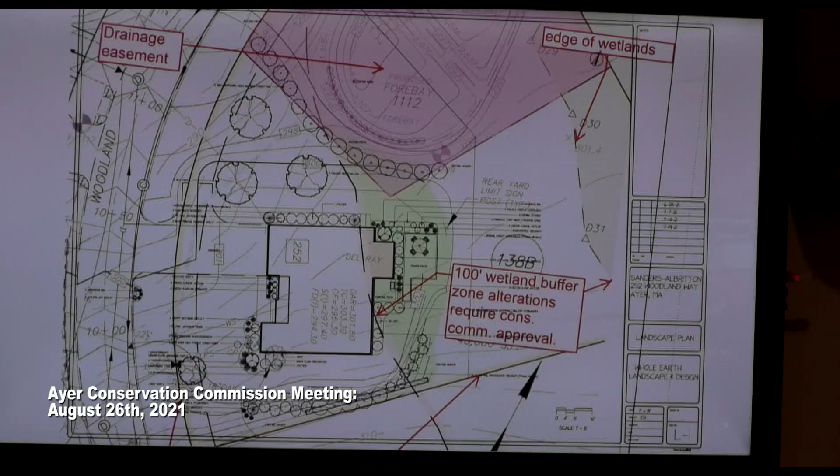I think along that row it might be forsythia mixed with some other plant, like a willow. I thought there were two or three different plants. So you've got forsythia, and next to the tree it says something else - oh yeah, it's forsythia and willows, two different kinds of plants. Some of which is forsythia and some is this - the forsythia is all the way towards the street, toward the left, with the odd, fluffy outline, whereas the willows are the round circles.

But really, very little of what they're proposing is in the buffer zone - just these few shrubs here, these few shrubs here, and then these plantings in the patio.

And you won't do those until probably next year anyway, right? Yes, the patio next year, with the plantings around the patio - I don't think we would plant them without the patio. That would all be considered the third phase all at once. And we've opted not to plant behind that because it's wild anyway, so there's nice coverage.

In the patio, you're proposing pavers so that the water would drain down through. Yes, we would do pavers, not stamped concrete.

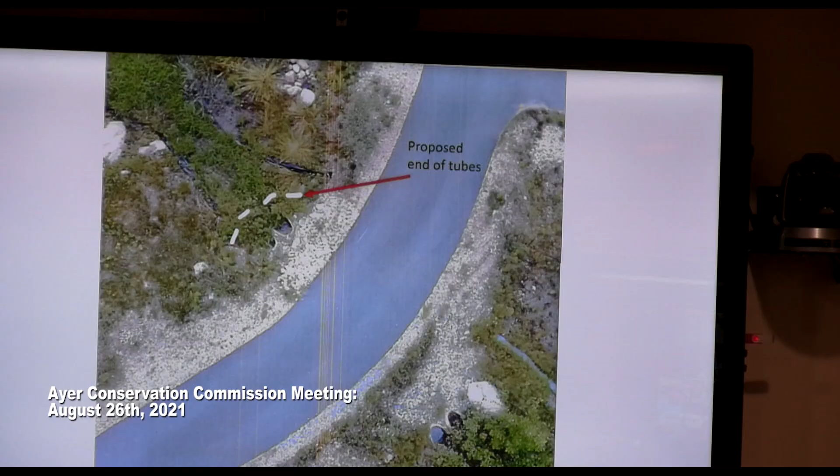Oh, yeah, she won't drive down our driveway, for example. But our proposal is to extend that slope about 3 to 5 feet to make the slope more gradual, and to raise the level to be level with the driveway, at least right next to it, not sloping down. The other side of the driveway, the north side, already has that configuration, and they're just not equal. So the goal is to make both sides equal and free from erosion, and safe to drive on in case you move a tire just slightly off the pavement. So it seems to be eroding. It is eroding, yes.

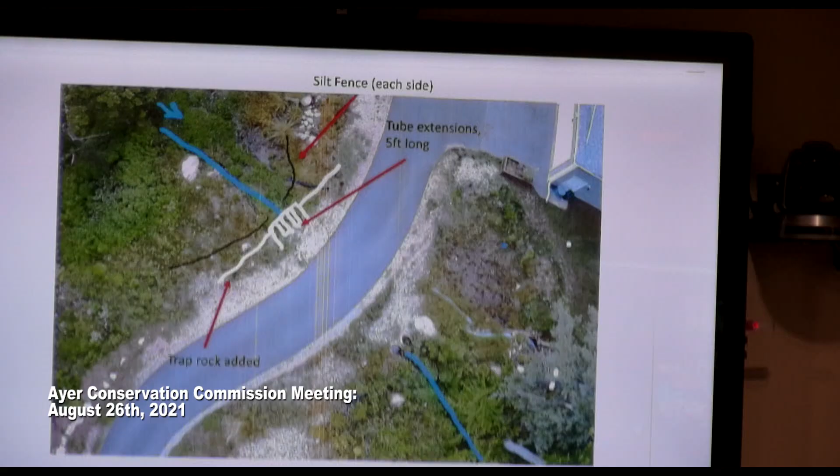The house was built in 2019, so the driveway's relatively new. The stone they put down was very small and sand-like, and it eroded very quickly. Currently there are rocks from the property just sitting on top of it to prevent further erosion, but that's definitely not sufficient.

Our proposal is to bring in Three Seasons Landscaping from Harvard to put trap rock on that surface to stabilize it. They would put a 1 to 2 foot drainage pipe inside the existing concrete drainage pipes to help extend those pipes to 3 to 5 feet, then blend it with the surrounding stone.

So flow is indicated by the blue arrow there, going from top to bottom? Correct. We're very conscious of making sure the flow is not impeded. We have a lot of groundhogs in our yard that use that as a thoroughfare, so we don't want to mess with that. We also don't want to impede the flow of water since there's a wetland upstream that flows down to a stream. The internal diameter of the pipes there is about 2 feet, so my request to the landscaper was to choose as large a pipe as will possibly fit, to try to maintain the diameter that's there currently.

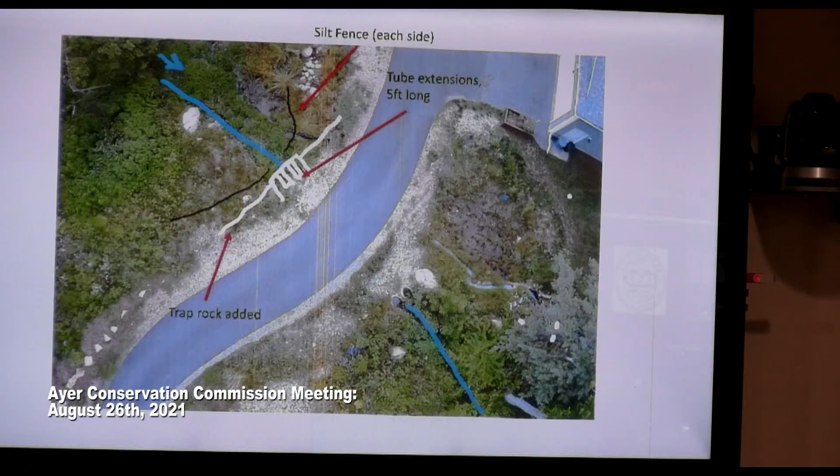So the trap rock would be extended about 2 to 3 feet? Probably close to 3 feet. And just trap rock, no dirt or anything? No dirt, yeah, just trap rock. There is a note for a graded base, but that would be immediately next to the driveway as a driving surface. Nothing with sand will be anywhere close to the wetland, only big stuff that won't flow off.

So this is really complicated, actually, because DEP has the superseding order on this, or has the order - this happened before I arrived, but somehow DEP is involved. I think in the past we've learned that we can still issue our own permits even if they have an active permit. I don't think Calvin has applied to have this cleared up yet.

You haven't told him to. Not yet. Since he does everything I ask him to. That's what he said to me the other day. Keep asking then. Yeah, I know. Let's make a list.

So for the whole project, they need a COC from the state for the superseding order. This probably should have been a more robust stream crossing than those 2 little pipes, and I honestly don't know what DEP would think about this - they're the ones that okayed that stream crossing, apparently. So if they have a problem with this, they could raise it during their 10-day appeal, but they sort of enabled the problem.

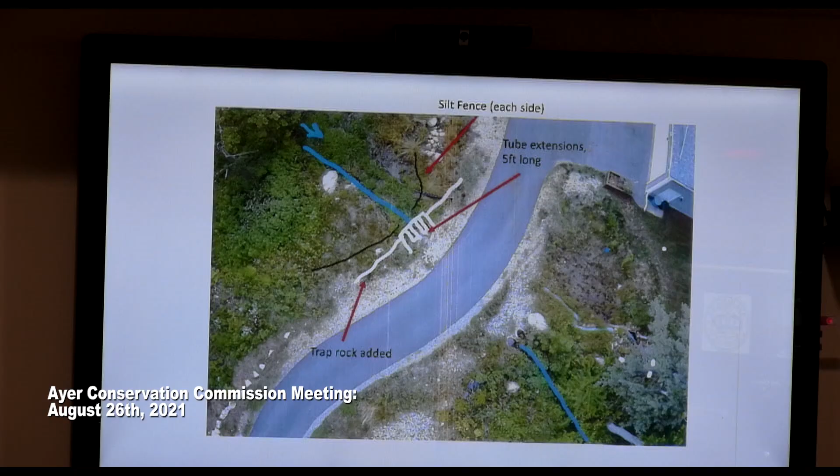So where you have that white line there, you're not seeing any buildup of water in that area? Nope, it's definitely not pooling. Because that's my concern, is that just putting the trap rock on top, eventually underneath is just going to wash away, and that trap rock will fall, and you'll be in the same position.

Yeah, what we do see if it's really wet, the area... So the water level does rise, but it's never so much that it pools. It's never gone over the top of those tubes that are there right now. The water level will rise right in here. There's really no standing water here. There's a little bit of an elevation change. This is about a foot above standard water level, and it pretty much stays that way.

We've never had a situation where we see standing water right immediately adjacent to the tubes, other than right at the stream. And so currently the stone they put in, that little gravelly stuff you talked about, that is essentially the limit there, where it turns green between that stone and that white line. Is that just basically vegetation up to that as you go toward the white line? Yeah, so this is vegetation, and keep in mind, this is only 2 years worth of growth because the house is relatively new.

So all of the white stuff you're seeing is leftovers from when they made the driveway. The location in question is really just this little area, and this white line is intended to blend the trap rock with the existing slope that's there. If you stand on the driveway and look down, it gets really skinny right at the curve, and then it widens right back out. It's almost like they needed another pipe under the driveway, and they just didn't have it, so they didn't make it.

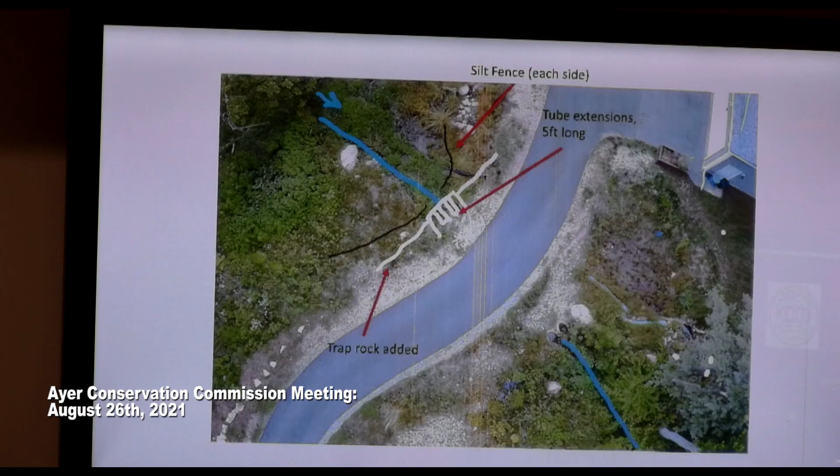Have you ever noticed in a heavy rain event how full the pipes get? So I guess what my question is, if you reduce the diameter of those pipes, will it still handle it? I believe so. You can hear the water flowing audibly during heavy rain events, but the pipes are never full. I've never seen the pipes actually full. They probably max out around half full.

So that big wetland to the north acts like a sponge. Yeah, and it's a very good sponge. And then it lets the water go slowly, which is why wetlands are good at preventing flooding. Absolutely, it's a wonderful thing. You mean they have a function that needs to be protected? Yes, I would say. Look at that. Exactly. And there's a permit for that.

So on top of this, are you going to replenish this at all, or is the trap rock just going to be in this area? Pretty much. Are you going to put trap rock across the? It might extend a little bit. Actually, is there another picture I want to show? Which way do you want to go? Oh, there you go. So the question was, will the trap rock extend down to this region?

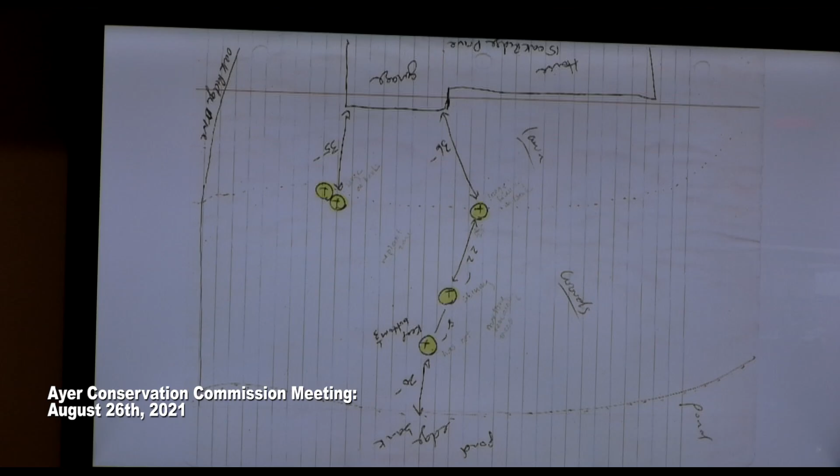So 4 will come down completely, one will remain as a tall stump. One will be cut at about 20-25 feet, because it's downslope from the house, and it's rotted up to about 25 feet, and we're gonna leave it there for habitat.

And your concern is that they're a danger to your house? Yeah, the one that's rotted out, if a storm came in, it would probably snap it and fall on the house. I mean, they're all very large, probably like 80 to 100 feet plus in size. They're very old trees, and they're all within 35 to 50 feet of the house.

Yeah, you know, as you guys know, we have a large number of trees on the property. But these trees are actually hazard trees that were noted by an insurance agency. And with the wind direction, those are the ones that are gonna fall on the house for sure. They could fall on the house, right? Yeah, and then the one that's closest to the house, I think about 70 feet from the pond, roughly 70 feet - that one's leaning over the house. And that's the worst one.

And you guys were leaving stumps, right? Just one. Well yeah, we're gonna leave that as a stump. So this is the one. I went over and had a nice visit, saw the chickens. So if you're standing with your back to the chicken coop, this tree on the screen is this tree. Okay, this one. Can you point it to this one? Yeah, the one. Okay, yeah.

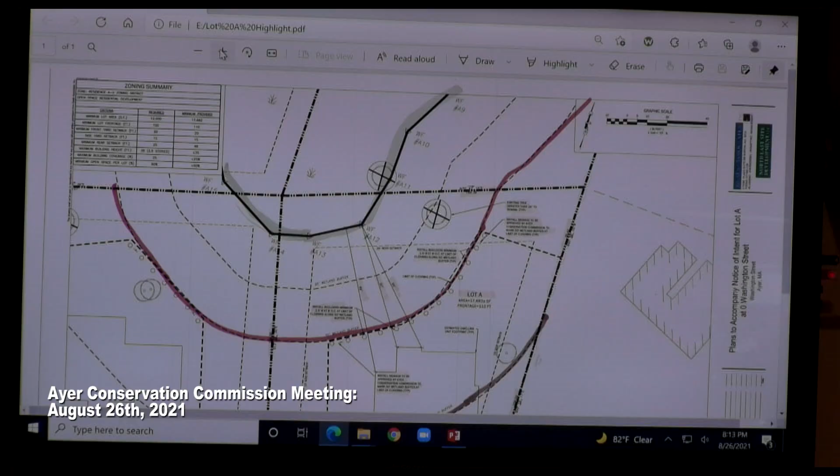This, I colored this up just to make it a little bit more legible, I thought.

The information provided on this update from Beals Associates includes the numeric offsets here of the different corners of the house, and I'll refer to my paper copy here. 69, 60, and 65 are these distances: 69, 60, 65 feet.

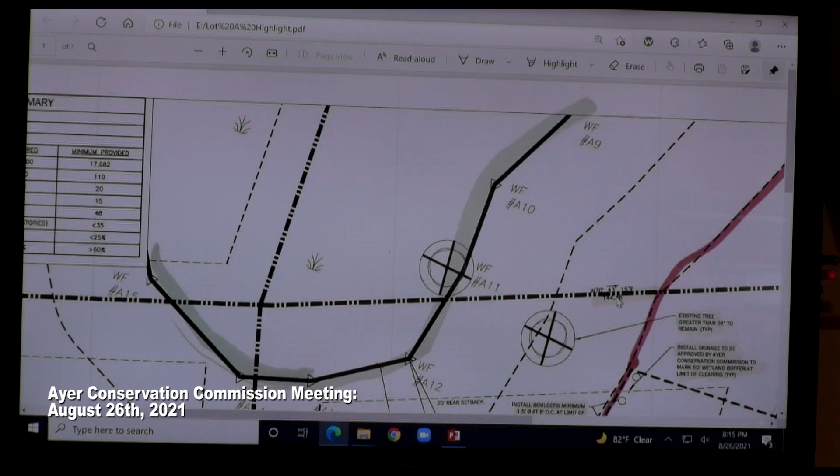So the notations are here as requested. We also put the dimensions on all the boundaries of the property. This is 110 feet on this axis here, and it's also shown here, both the compass heading as well as the distances, as Joanna requested.

Limit of work is this dash line. That would be a hay bale boundary.

I don't know if this is the appropriate time or later, but our plan with Natural Heritage, even though these are far removed from the estimated or priority habitat, is to do this as a comprehensive exclusion measure, where this fence is essentially going to be continuous around both of these lots, keep on going out to the subdivision road till we get to Gaskins Drive.

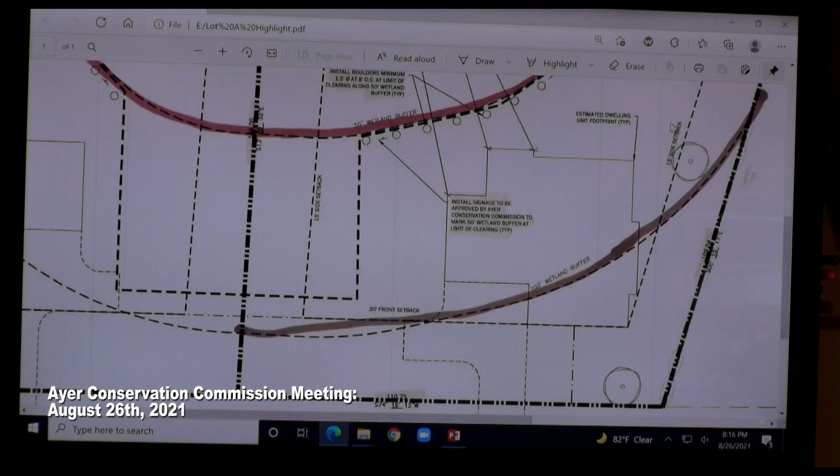He's not going to be selling lots or anything, so he'll control it from soup to nuts and be able to maintain the fence. If we have to move it for whatever reason during the process, we can do it in a way that's compliant with Natural Heritage's wishes. So ideally we'll integrate all these together for the site clearing, and that way we'll exclude all the animals.

Of course, there's no worry about trespass during the winter. So after November 1st, it's not a critical matter, but up until that point, and then after April 1st of next year, we're going to want to keep this site basically isolated from the rest of the planet, from a turtle's perspective, is the intent.

It's low probability. The blind turtle walking through here has a low probability, but it happens more than you'd ever imagine. And in these kind of suburban remaining populations, mortality of even single individuals is pretty significant to the persistence of the population.

So we're taking it pretty seriously, and Natural Heritage has been very agreeable on this, working with us. We do this, we're doing it on the solar farm across the street, we're doing one in Sharon, we're doing one in Amesbury, we do it all the time.

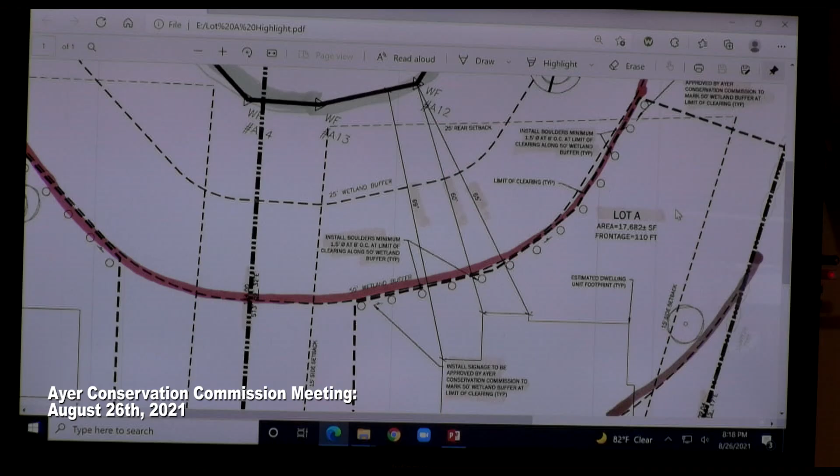So I think that's it. I think we've met your objectives here, or your desires. Boulders, signage, we've got the dimensions on this plan, the limit of work is clear, and we'll have that done by S&M Farms, who does a superlative job.

I was arguing with somebody today who was going to use another contractor, and I said if you do, and we come down there and the fence is no good, we're going home and we're not coming back till it's fixed, and then you're going to cry. So use S&M Farms.

I think people think we get a kickback from them, but they just make our lives easier. Yeah, they do it very well, very quick, and I think cheaper than others.

So based on what it's saying there, if I'm reading that correctly, that's 1.5 foot diameter boulders minimum? That would be minimum, yeah. I anticipate that most of the rocks are going to be somewhat higher.

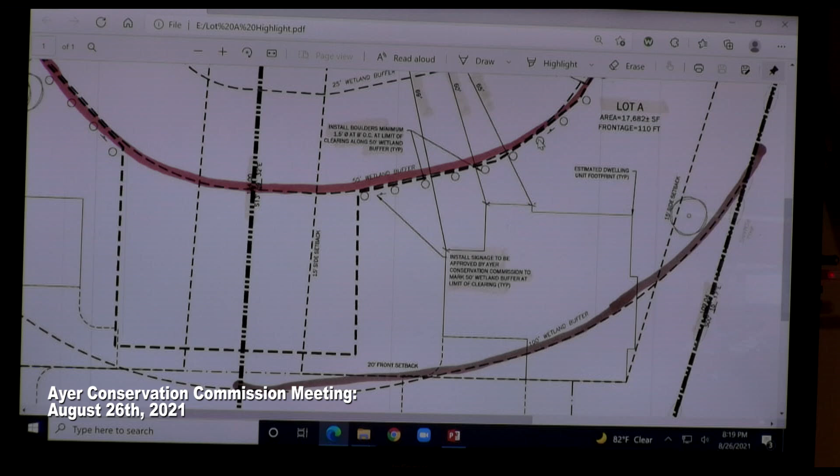And then you figure 2 feet out from center, that basically leaves a 6-foot gap in the middle. I'd be okay with that. So a slightly bigger rock than 18 inches, a 2-foot diameter minimum.

I think so, probably can accommodate that. No problem. I'm sure we'll still be trying to get rid of rocks at the end of it. There's an old stone wall that bisects a portion of this that has to get relocated, so some of that is gonna be used for this, so not a problem getting 2 feet.

So the order can reflect that, and we can update this plan for the record, just so there's consistency. If it makes you more comfortable, we're happy to do that. If I can just take a sec here.

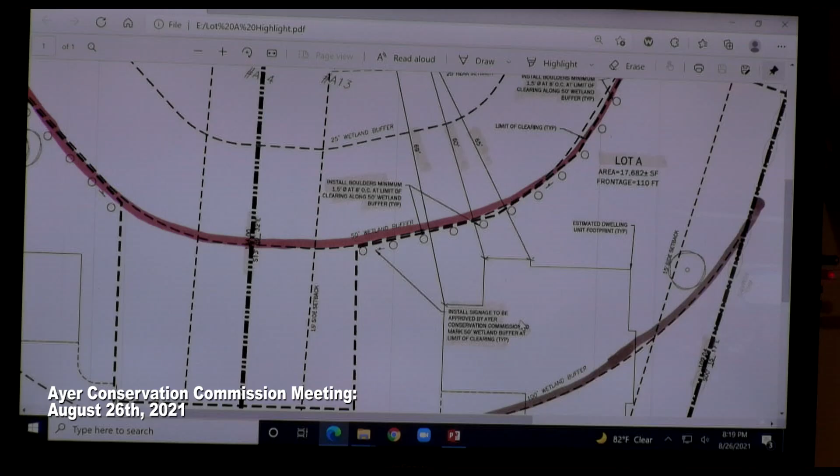We had a new homeowner in just now who didn't understand the order of conditions, didn't understand the buffer zone, because nobody told her. I was able to get her the subdivision engineer's plan, and she just came to us with her landscaper's plan superimposed on the engineering plan.

So you can have these—this is what we like, this is what the commission likes. Because you're going to have some lots with stormwater basins on them that'll probably have easements of some kind for maintenance. We would not on these two lots, but we will on the larger one.

Yeah, when we get to the other stuff, just to stay on task. But just when we're thinking holistically, it's not just satisfying the commission so the plans are a certain way. It's the homeowner who has to come back to us again and again every time they want to do something because they're in the buffer zone.

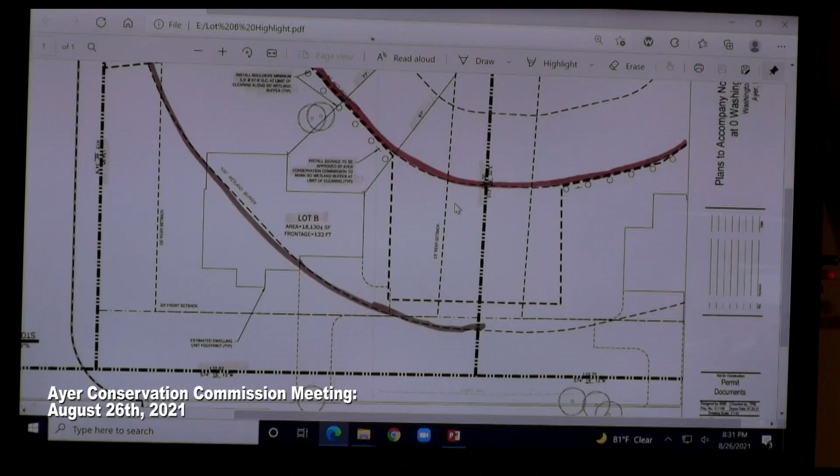Anything else? I wonder if it would be a good idea to put a rock right where the 50-foot intersects with the property line. Here, you mean? Yeah. On one side of the line or the other, just so... The other thing is we'd have to - we could probably snake some kind of equipment in there, but it was intended to be undisturbed.

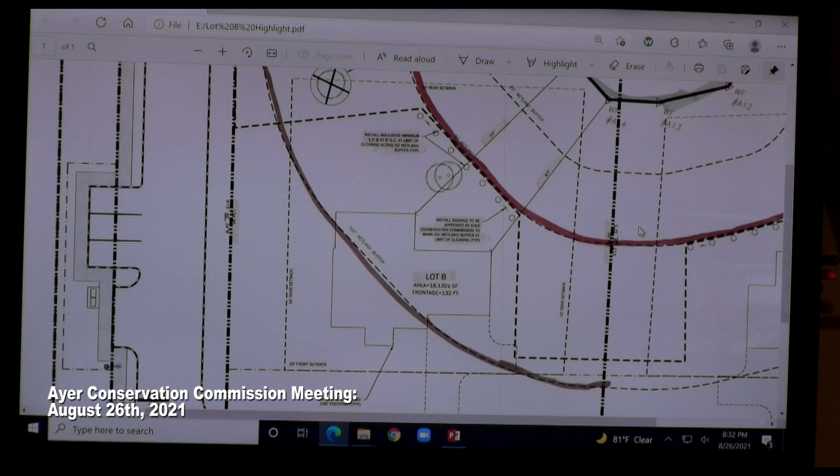Brian brings up a good point, that to get said rock in there I'd have to disturb it and bring a machine, a bobcat or an excavator, to move aside the rock that couldn't be moved. I think that would be counterproductive. Yes, you're right, but maybe a sign on the post would be appropriate, so if somebody... Yeah, that's fine, if you're okay with the signs, I can have the survey lines - for planning purposes that line runs straight. So we can put a sign there and some demarcation, that's fine.

Anything else? No? Motion to approve the notice of intent at 0 Washington Street, Lot B, DEP file number 100-0462, as amended. Second. All in favor say aye. Aye. Opposed say nay. Passes unanimously.

So we can hold off on those orders until a couple weeks or whenever showing. Yeah, okay. All right, there's a motion to continue the public hearing on the notice of intent at 0 Washington Street, Lot B, DEP file number 100-0462 until September 23rd. Second. All in favor say aye. Aye. Opposed say nay. Passes unanimously.

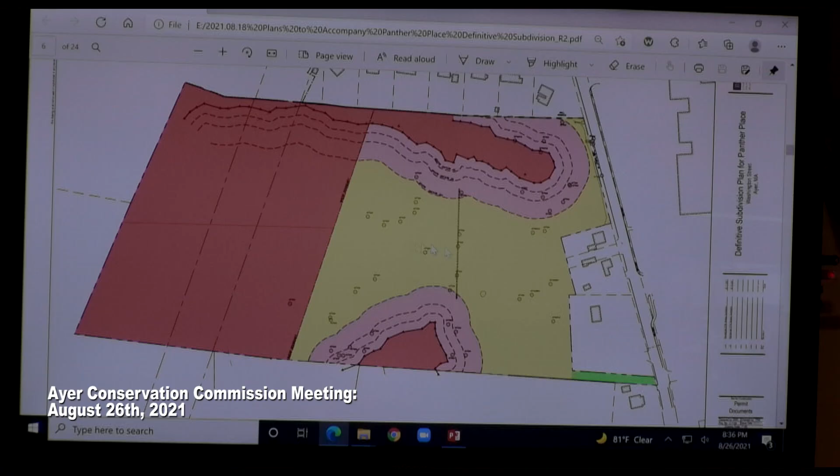Perspective here along - this is the approved wetland line in the respective buffer zones. Just so you can see, much of the site is without resource area, including the majority of the restricted area, the future restricted area. C2.3, I think, is our...

There we go. Yeah, actually, for the current discussion, here we go.

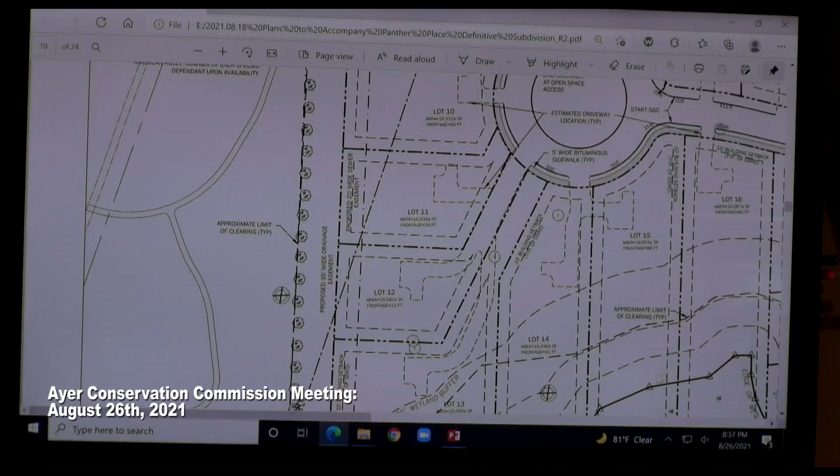So what we have before us under 460 is essentially the clearing and grading for 2 point source discharges, which is on the future lot 6 here. We have a stormwater point source discharge.

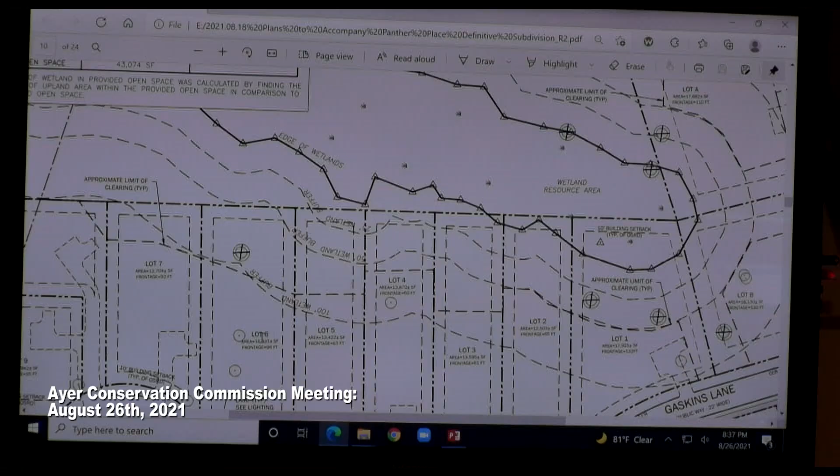Oh, yeah, whoops. Did I jump pages? Yeah, down. No, here we go. Lot 6, okay, but I want the next page, right? I jumped. There you go.

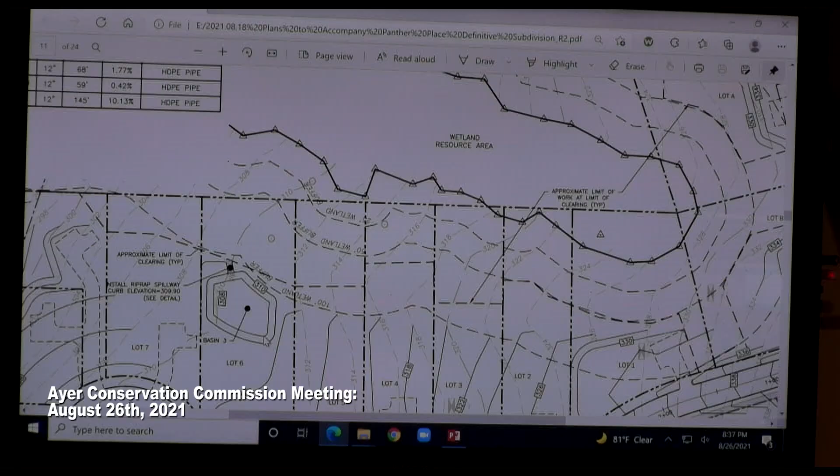So this stormwater basin is actually outside the buffer. Here's the buffer zone, 100-foot buffer zone, 50-foot, 25 in the wetland. A small detention basin is on lot 6, so it'll be an easement, as Joanne referenced. There'll be some of that associated with some of the lots, a small fraction of the lots.

This one is standalone. The point source discharge here is at the buffer zone, so there's really no work in the buffer zone, but during a named storm event it will discharge on occasion into the resource area. The stormwater has been designed to partition the drainage to mimic the current scheme and to decrease the net flow rates across the board.

So does that just receive sheet flow? Well, the plumbing's not shown on this illustration, but this will collect water from a portion of the cul-de-sac, I believe, and I'm not sure what the- No, it'll actually collect it from the adjoining lots.

Oh, is this just terrestrial? This is the drip coming off of lots 2, 3, 4, and 5, and it just comes down into a low depression of about 2 feet to collect and then discharge out. Okay, this is not associated with the road. Okay, so that didn't catch any hard surface?

In that regard, thanks, Joe. So that's why I think it's a small basin, and it has this riprap spillway that will discharge at the appropriate storm event as an emergency overflow. But the net balance of stormwater will mimic the pre-existing conditions, so it won't negatively influence either the specific property.

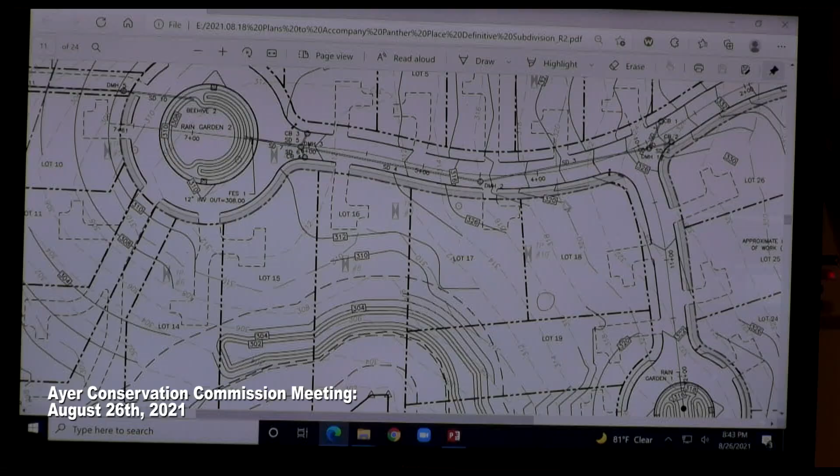Under this order, we're asking for approval, given the modification you've requested in our submittal process, that we would like to, in deference to Blanding's Turtle and MESA, isolate the work area, all these stormwater basins, much of which is outside of buffer zone or any kind of jurisdiction, and ideally tie it in with Lot A and B, but Lot A and B can easily be standalone because they're kind of sequestered off by the road frontage.

So it doesn't matter, I don't think, as much to Joe if those are a separate item, but our intent is to put our erosion control / limit of work, which you can see follows the 50 here, but then this is a design item more than erosion control or turtle control.

This one leaps up here, so these houses are not just a kind of cookie cutter. So we've spared quite a bit of buffer zone here, then it goes back so that this house can be offset from this house. We can see all that on the other illustration. So it's all thought out pretty well.

So the road limit work will be here, then it'll be here on this lot, here at the outlet of the stormwater basin, and then it will go around the outside.

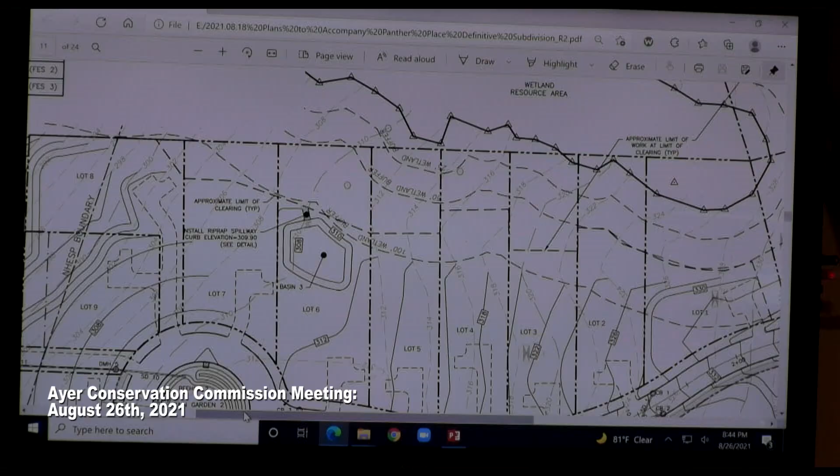Let me see, come here. Yeah, I'm sorry, does it go here, Joe? Oh, you gotta scroll over a little bit. I gotta move it, scroll over. Yeah, because it's gonna go all the way around, you know, because you gotta. Yeah, it's gonna follow this limit, yeah. Yeah, all the way around. Yeah, all the way here, around.

And then if you just scroll down, yeah, and it'll come back up here, and up, and then come back into the property, so to speak, here, and so forth. And run at the 50 for this length, and then back to the property line, and so forth.

By doing that all in one assemblage, we'll have a pretty high degree of certainty of keeping the turtles out. Under its current condition, it's pretty unlikely the land turtle would want to spend any time there, except maybe perambulating, but unless they're going in the right direction, they're going to end up on Washington Street and an uncertain fate. When construction's active, they smell the disturbed soil. In case anybody asks you, the smell is geosmin, from disturbed soil, and it attracts turtles and other species from long distances.

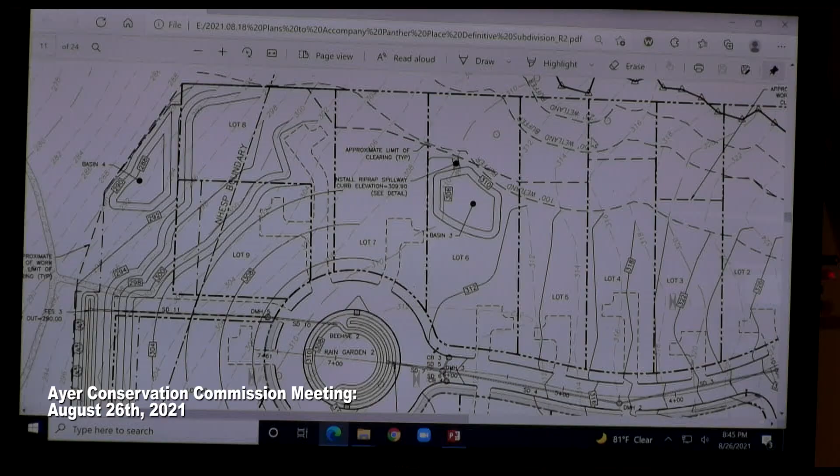That's why we want to have this locked up for next season particularly, because come June of next year, there'll be disturbed soil, and animals living a quarter mile, half a mile away will sense that, and if they come up there, we don't want them to be able to access it.

So it's somewhat of an integrated plan here with Natural Heritage, even though their activity is more a MESA issue than a 1059 issue, because we're not altering any wetland resource areas.

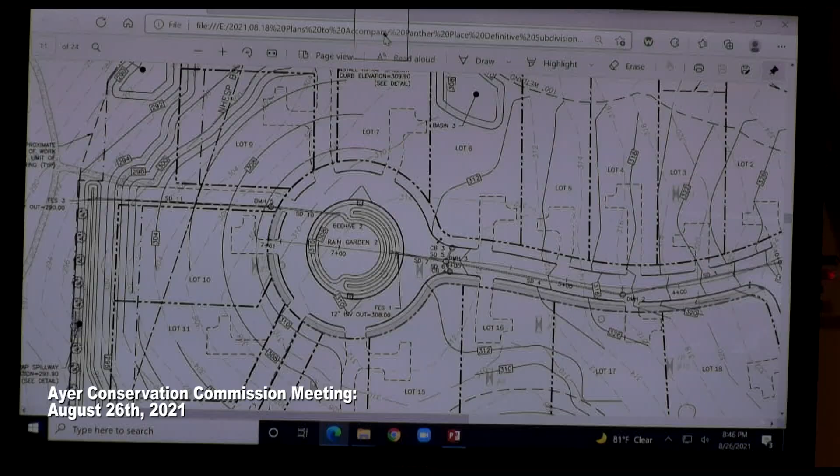So our approval request here is for those stormwater basins, stormwater features, and the ancillary work, both in upland that you don't really need to approve, but the buffer zone work that you do need to approve. So it'd be this basin, the tangential work there, and then the clearing of the area shown as the limit of work here, that we've just traced around the perimeter.

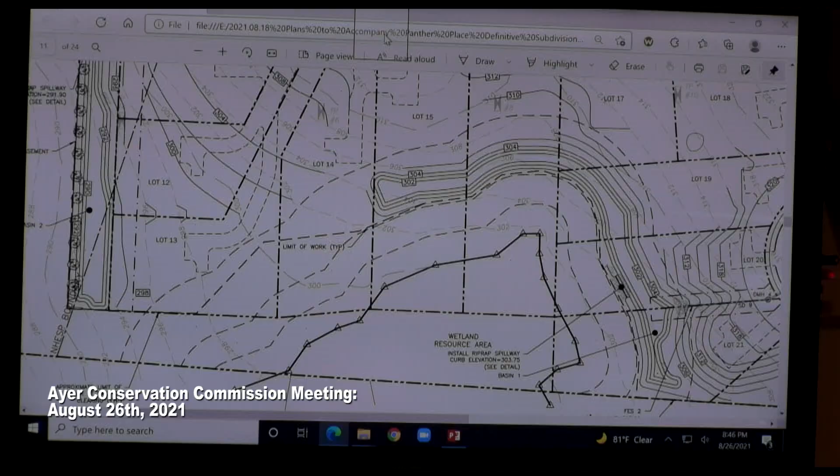We think that's pretty simple. And the basin on the bottom, that isn't getting road runoff. Am I reading that correctly? It's acting like the previous one. It's just grabbing the sheet flow from the backyards, and then it's pulling down to the discharge point.

And that's why it's such an elongate structure, Joe? Yeah, it's to grab all the sheet flow from the joint. So I'm looking at the rain garden, and what's SD8? Is what that be, storm drain 8?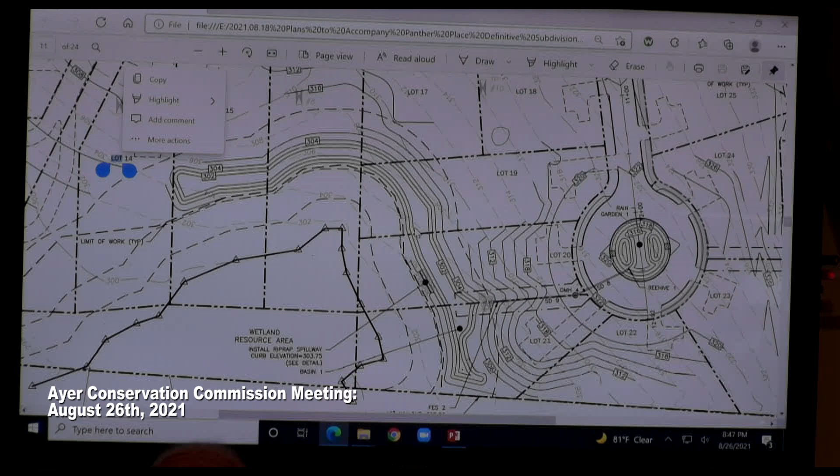Off the beehive there on the right? Yeah, so that right there, there's a rain garden in the center of that. And that is just for an overflow for a 100-year storm event.

In that event, they would fill into there and then discharge outside and then slowly fill in. So to this head down to there - yeah, that's only for the, actually it's like only for the 100, it's either the 25 or the 100-year event. It's just the overflow in that extreme situation.

So this is the overflow for all this kind of manufactured swale, and this is riprap, for velocity. Oh, that's just a swale there, okay. Yeah, that's just the property line there, that dash line.

And so right now, these basins are approximately 2 feet deep or so, and what will they handle from a storm event? Well, everything will be rain gardens, so all the road runoff runs into there so it can be treated, the organic, and then it kind of seeps into the ground slowly, and then it goes underground for absorption back towards the wetlands.

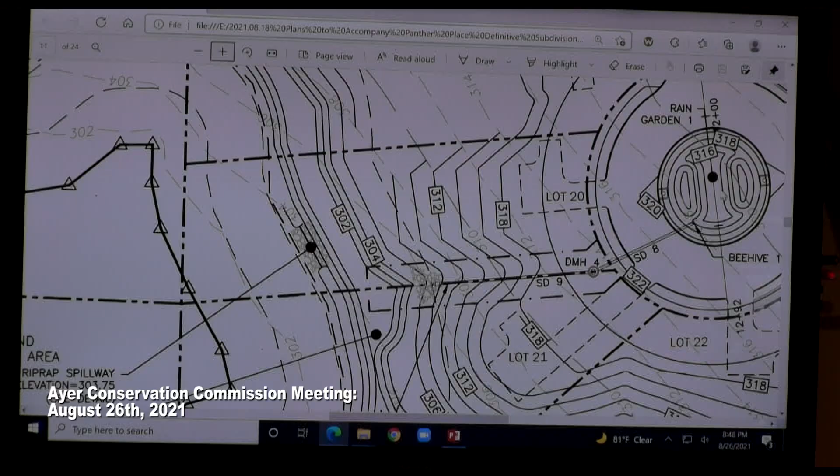But the pipes there, in case of the 25 or 50 year event, if it fills up, then it'll overflow and discharge. And that long linear basin has been resized to take the 100-year, 24-hour storm. About 8.9 inch or something like that.

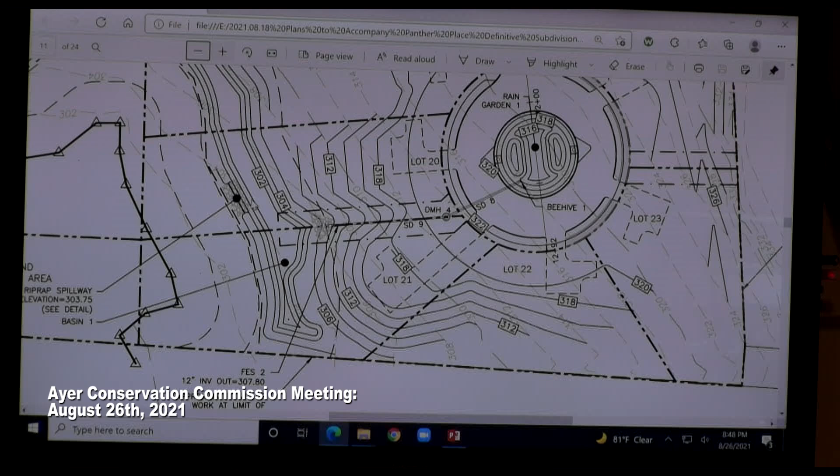So the 303.75 there, the elevation for the spillway, when it essentially overflows, is what that number is, right? Trying to see which one. On the left there, yeah, that one. So if you take the line down to the left, it says riprap spillway elevation 303.75. Oh, right here, yeah.

So is that when it would overflow if it got that water? Not even, that's just for the larger swale. So as the water kind of pitches down to that, everything pitches down to that point, just like the one we discussed previously on top of the plan. That's just the normal spillway and the riprap, just for normal drainage.

But I think, Joe, here's the 304, which I think is the top of the berm for this area. And so that's 303.75. Yeah, so see how it's 302, the deepest. It fills up, and then it overspills. It'll have a quarter foot of headroom here when it's discharged in there.

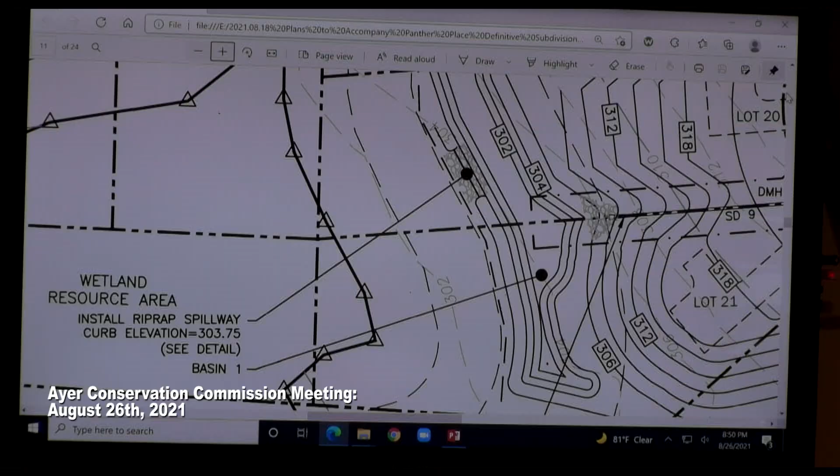Okay, and that happens beyond the 100-year? With the 100-year? That's just my question. I don't want to tread into waters that I'm not an expert on, but I think the 100-year is more from the pipe, and when they had to widen it out a little bit, so it's in that extreme event where it's going to come up so high that it's got to overflow.

But for the most part, a lot of this is the same - actually, when this design was given to DPW, this is the same stuff DPW has been using. Because the majority of this design is that it sinks down to the ground and travels underground.

Towards the wetlands. Is that what's doing it? Yeah, oh really? Yes. This is only for the extreme events of the 24-hour periods where it will overflow.

And so I guess what I'm getting at is, for 99 years out of the life of this, let's say, you anticipate nothing in there, maybe a small 6 inches of water in there? I imagine you'll get a heavy rain event, it'll pool for a little bit, then over time that's how it works, then it dissipates.

And as I got my education as well, it's actually better because if it travels underground slowly, then if you have a drought situation, water is stored more in the ground, as opposed to just being rapidly discharged out. So it's stated that it goes towards the wetlands - as it sinks down, over several weeks it makes its way to the wetlands, so you don't lose the water.

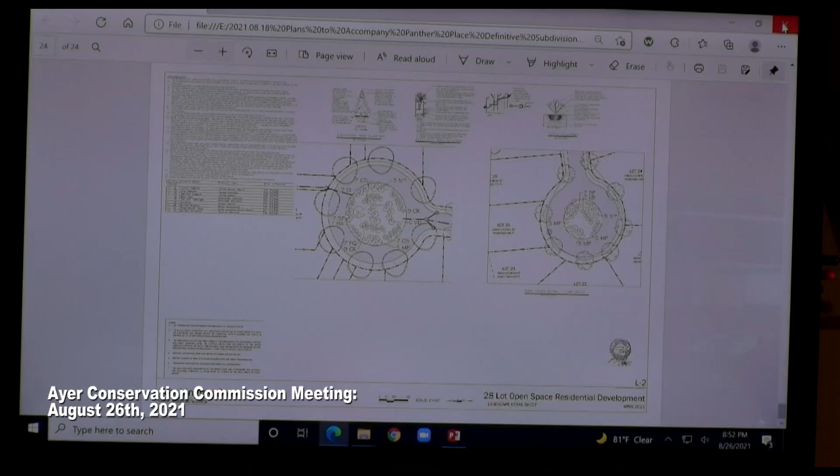At this level you can see the limit of work area. Close it and open it again to see if that helps, because it's static now. Yeah, go a couple sheets here, keep going down if you don't mind. Keep going, keep going. Yeah, that one.

Okay, so if I'm seeing it correctly, you can kind of see that dark line outline, right? That's your limit of work. You're clear. Yeah, but actually it's nice and bold here.

You see this is the separator between lots A and B that we discussed a little earlier. A little visual screen. These are the jogs to make it so these- we didn't want to make these houses, or Joe didn't want to make them all lined up like barracks. By variegating the offset here, that allows a little stagger of the houses so they're not all looking at each other. Now you can see the one down on the bottom wetland too, much better, with the bold, thick line here.

So what we're considering now is everything here, this discharge, and this discharge, and then the clearing that supports that. Most of which is well beyond the buffer zone, but we don't want to split it up. To build these basins, we need to get into the buffer zone under this approval, to prep the limit of work and to do a consolidated turtle barrier as well. It's all benefits. It's been about a year and a half in the plan or something, so it's not.

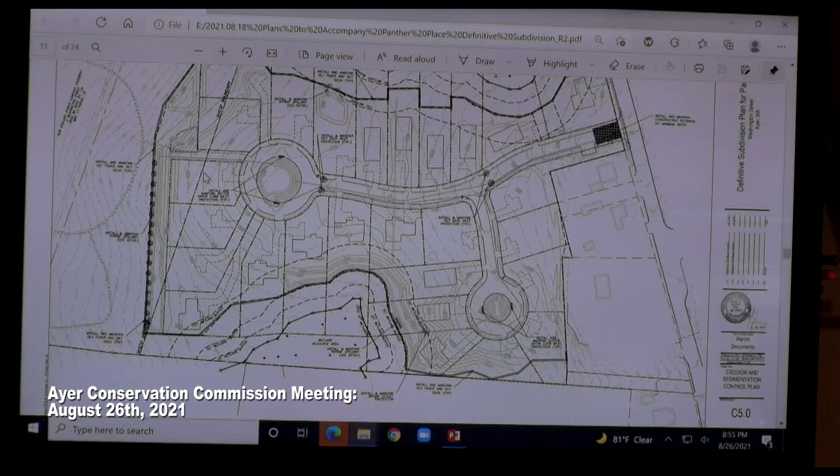Essentially it doesn't really lead to another property, because you go into wetlands if you go to the north there. But it's an amenity, I think, that will probably be enjoyed by these folks, and if somebody else wants to come in from here or other parts, they can certainly take advantage of it. It's not going to be a marathon hike trail. I don't know if we've done the linear feet of it- I think it's like a figure eight, probably like 1,500 feet or something, or maybe 2,000. It goes back and stuff like that, so anybody can access it and walk back there. Kids will have fun. No turtle fence for that, because that's outside the limit of work.

Who's responsible for maintaining the basins? There will be an HOA for the subdivision, and there will be a maintenance plan. It'll probably be biannual, a hired landscaper will go in and clear out all the basins. It's not just arbitrary, there will be an organization set up to make sure it's getting done biannually or so. Will there be access to the basins? Yeah, there'll be easements granted so a landscaper can get back there, clear out debris. Probably a lot of handwork, some weed whacking, just to make sure it's clear.

The clearing will be defined similar to what Deshane provided us with, for how to properly maintain it. Yeah, there's an operation and maintenance plan already in existence for the basins.

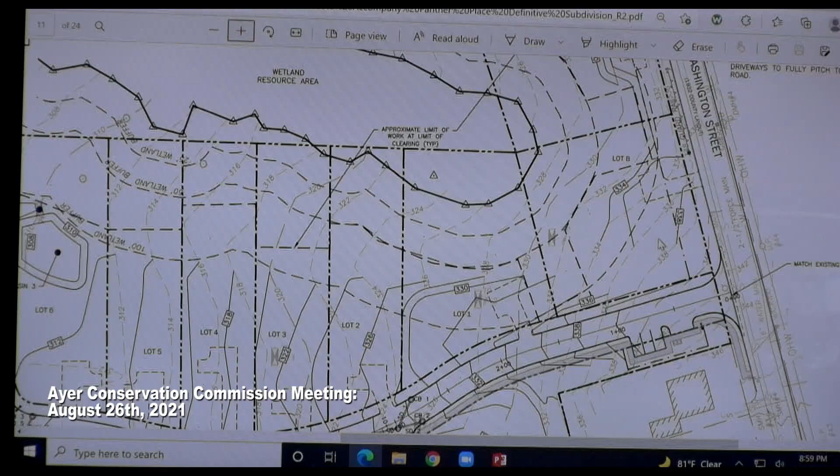Okay, and in the future we'll show you, one by one, the house locations and such, and amendments and stuff.

And what are they doing, having you put sidewalks just on one side? Yes. And lots of trees, I saw lots of trees, street trees. Yeah, I think there's like three different varieties of street trees. Nice, somewhere there's a detail.

Need to go out there and take a look at this stuff? There's a tree plant here. Yeah, look at all those trees, that's nice. Well, I would recommend that you do, and I come with you, just because that's what we always do. Can we do that on Tuesday? I can do it on Tuesday.

This is going back into the same area, further back. We were just up in that corner. So we probably want to tour these areas. And we have the wetlands still flagged out there, the boundaries are flagged, and it's actually much easier walking over there than where we were. When you get further away from the road, the understory is pretty light. Still recommend long trousers.